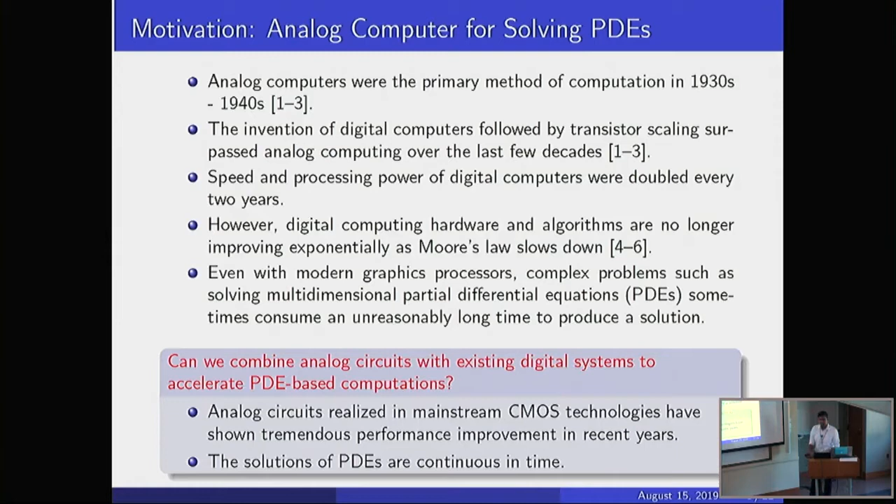Also, even with modern GPUs, complex problems such as solving multidimensional partial differential equations sometimes consume an unreasonably long time to produce a solution. So the research question is, can we combine analog circuits with existing digital systems to accelerate PDE-based computations? We think there's a possibility because analog circuits realized in mainstream CMOS technologies have shown a tremendous performance improvement in recent years, which hasn't been explored in analog computation yet, and also the solutions of PDEs are continuous in time, which is a natural fit to solve using analog computers.

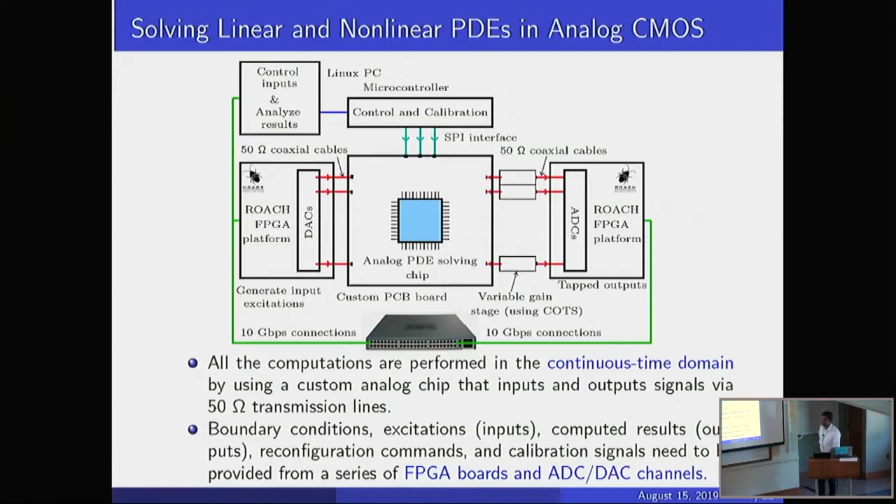So this shows the overview of our proposed system. All the computations are performed in the continuous time domain using an analog custom chip, and boundary conditions and input excitations are generated inside the ROACH 2 FPGA and supplied to the chip using a DAC card, and the computed results are then fed back into the FPGAs for post-processing using an ADC card. We are using a microcontroller to program and calibrate the analog chip using an SPI interface.

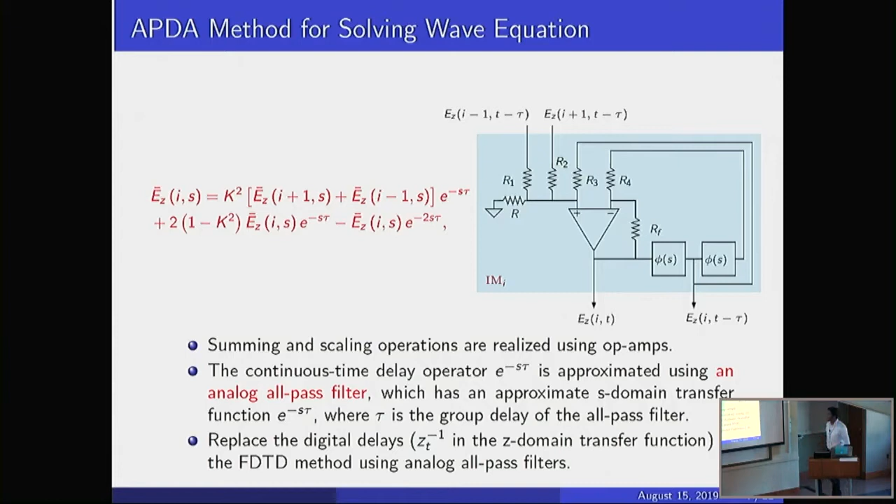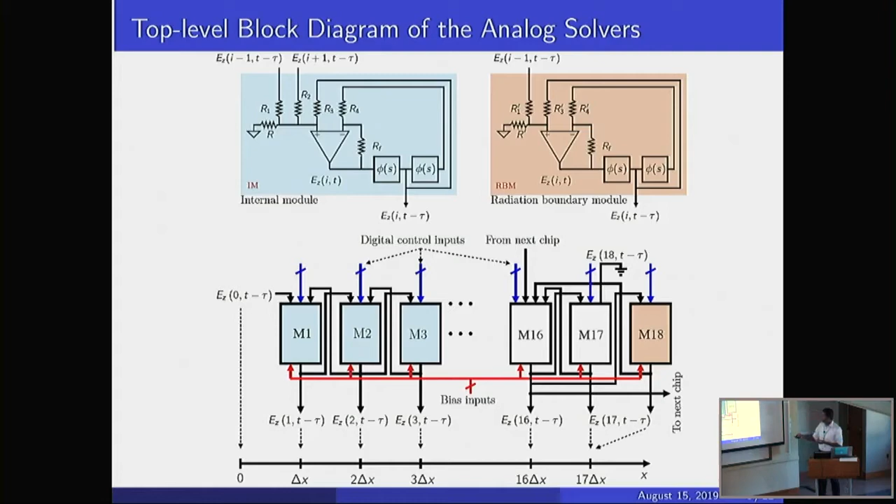So each module corresponds to one particular spatial point, and module 1 to 16 is based on the internal module, and module 17 is used to simulate Dirichlet and Neumann boundary conditions, and module 18 is used to simulate the radiation boundary condition. So I'm not going to go through the circuits here, but I'll show you the final layout of the chip. So here you can see this.

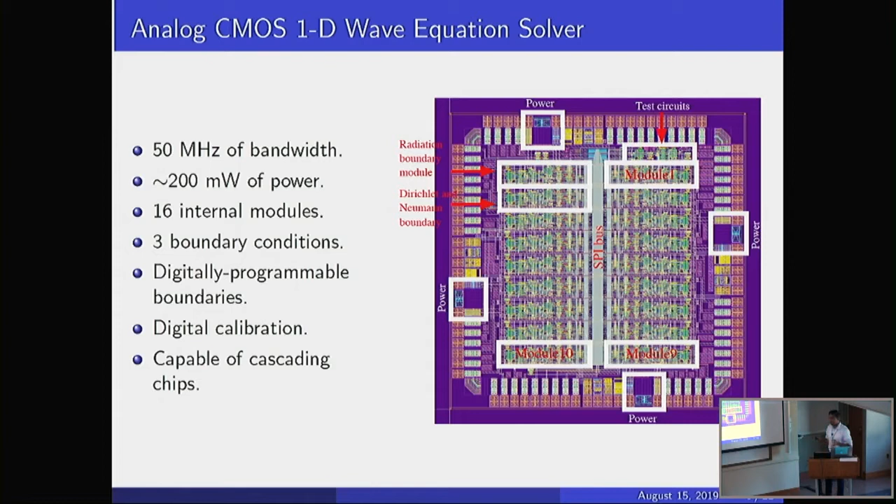We have 18 modules, 9 in one side, and this chip has a bandwidth of 50 megahertz, and the power consumption is 200 milliwatt, and it can simulate 3 different boundary conditions, and we can digitally program them. And each module has digitally programmable gains, which can be used for partial PVT variations. And also this one can be used to cascade different chips to simulate a larger spatial dimension, but we haven't tested it yet, but it has the capability.

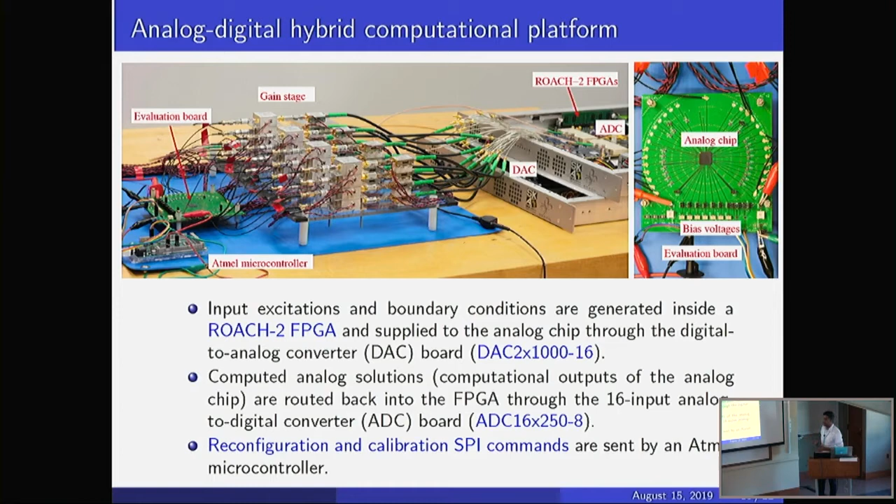So we are currently working on improving these results using an optimization technique for the calibration, because the calibration is the main issue. We have several gains in each module, and also we have several bias voltages. So initially what we are trying to do is optimize the bias voltages. Here we have 7 bias voltages. We are trying to optimize these bias voltages in order to minimize the noise to signal energy ratio.

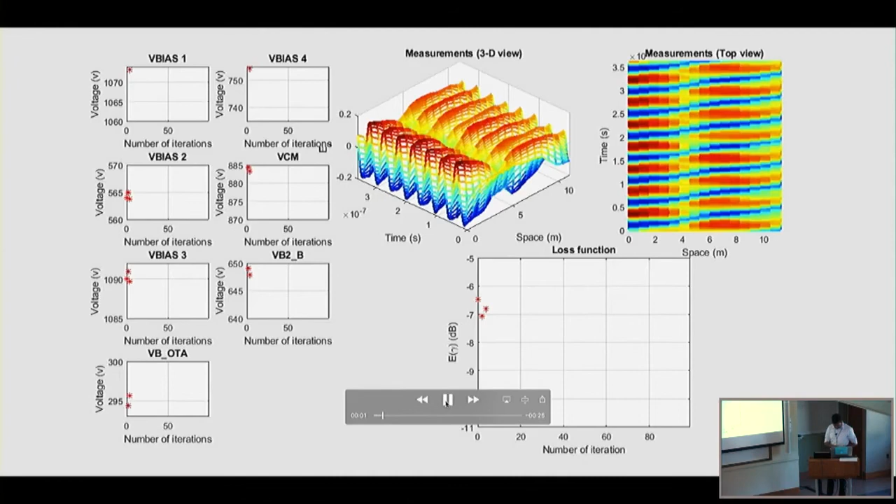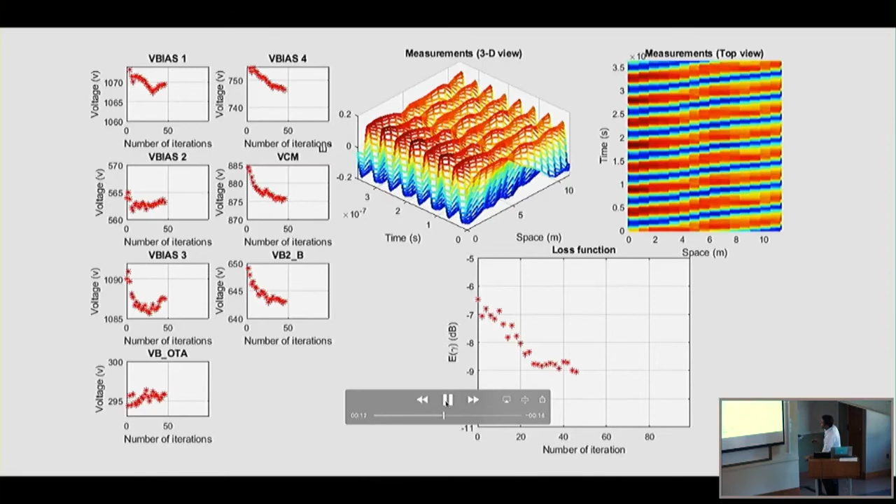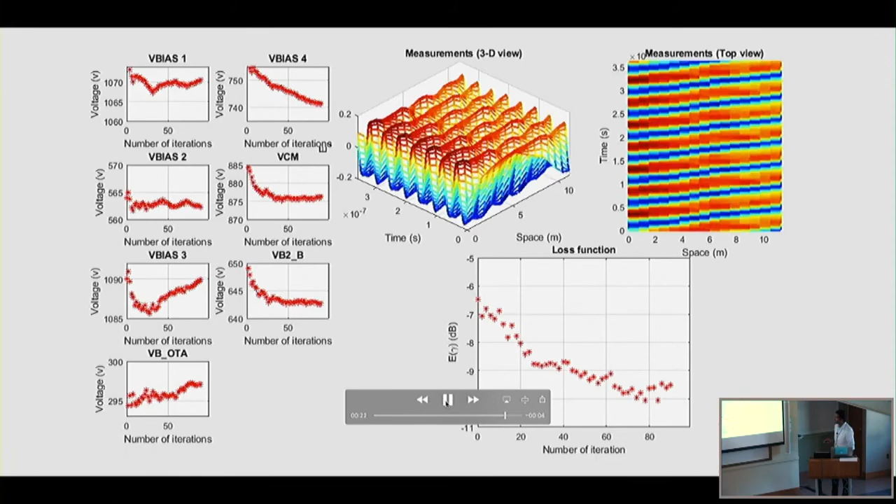So here we show the loss function or the objective function, which is the noise energy to signal energy ratio. So let's see how it automatically improves the results. So you can see the bias voltages are changing, and also you can see it automatically tries to adjust the outputs so as to improve the noise energy to signal energy ratio. So it will improve the results. So these are the measurement results, and let me go back to the presentation.

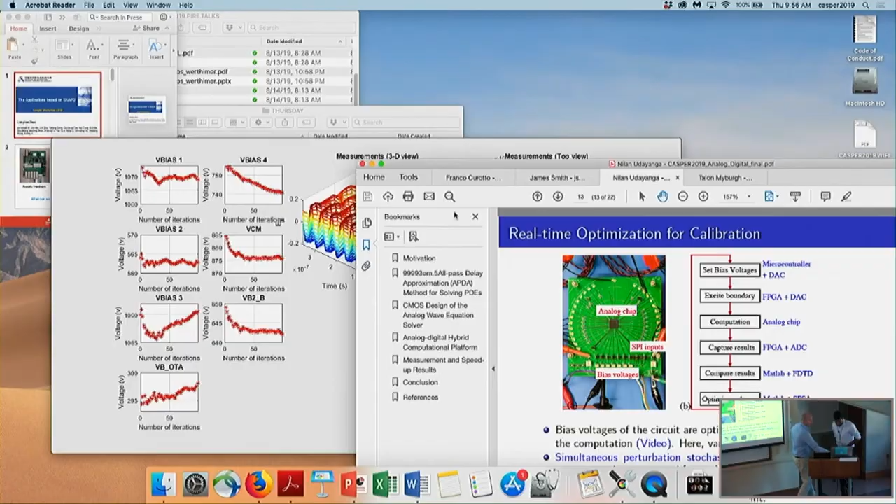Do you know? Okay, thank you.

So we estimated the speed up of the analog chip. We have compared these results with a finite difference time domain solver, which is executed on an NVIDIA Tesla K40 GPU. Based on the results, the equivalent temporal bandwidth of the GPU-based FDTD solver is about 1 megahertz. And comparing with our analog solver, the speed up is about 30 times, and it only consumes about 200 milliwatt of power.

We haven't compared the power yet, but it has a speed up of 30 times. So it doesn't mean that this chip can beat the digital computers that we have right now. Let's say if you implement a digital chip which can only solve the 1D wave equation, it can have more bandwidth than this, but this method shows a promising pathway that we can explore to accelerate analog computing based computations.

So as a conclusion, an analog computing method has been introduced to compute the continuous time solution of the wave equation. A 1D wave equation solver has been designed, laid out and fabricated using 180 nanometer CMOS technology. A prototype of an analog digital hybrid computation platform is designed and implemented using an analog chip and the FPGAs. Measurement and speed up results are provided that compare the results with MATLAB and FDTD.

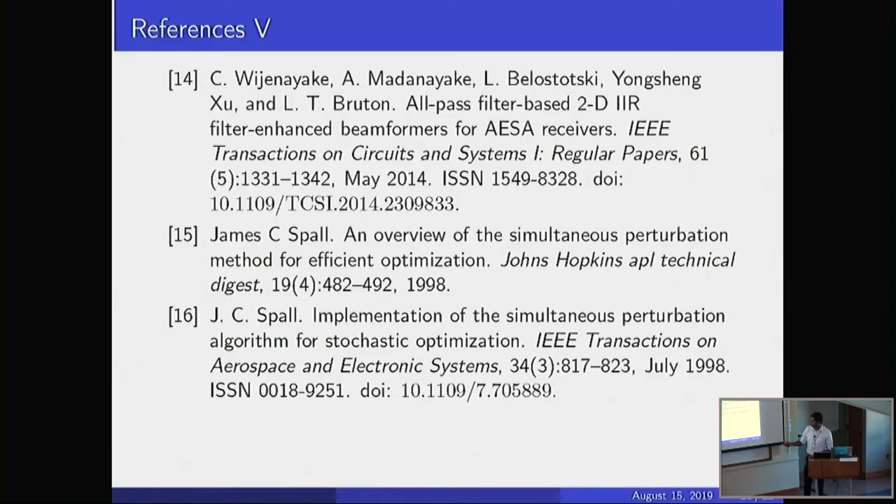So that simulation that you did, was that showing the reflections on the analog surface? Yeah, you mean the video? Yeah. Yeah, those are from the analog chip, and the outputs of the analog chip are taken back into the FPGA, and these results are in the analog digital version, but the computation happens in the analog circuit.

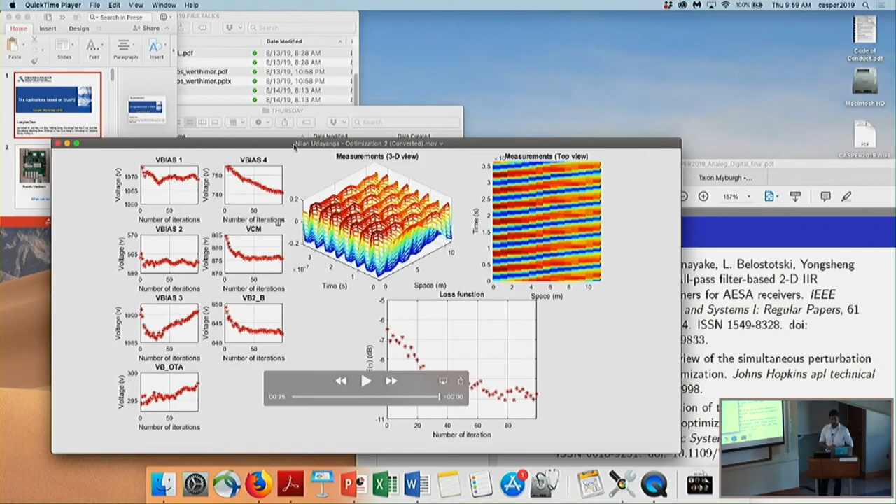Yeah. How did you convince anyone to give you funding to build an analog computer these days? No, there are so many applications. Even now, DARPA has 2 RFIs. They are not generally focused on analog computations, but they are for solving partial differential equations, because most complex partial differential equations don't have an analytical solution as well as a numerical solution. So they need a different technique than the digital circuits that we have right now to solve those. So we can explore this technique for those kinds of applications.

So this technique really lends itself to wave equations. Is it limited in the type of equations? No, we have come up with the algorithms for Maxwell's equations as well, for both magnetic and electric fields, and we are now working on nonlinear partial differential equation solving using analog computers. Most probably within 1 year, we will come up with one chip which can solve one particular nonlinear partial differential equation.